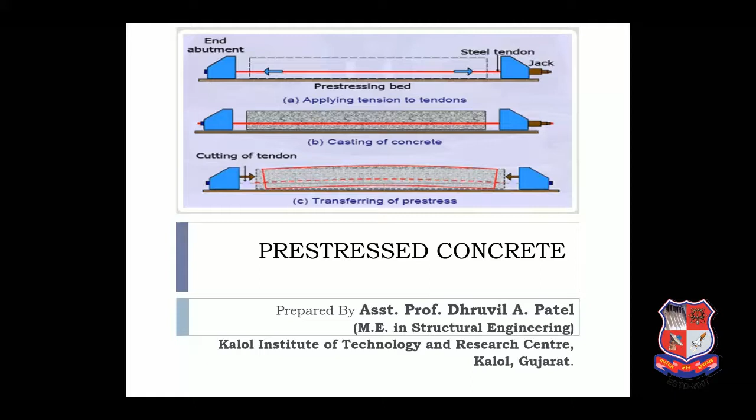First of all, what is pre-stressed concrete? Pre-stressed concrete is concrete that has had internal stresses introduced to prevent, to the degree desired, the tensile stresses that will be imposed in service. The pre-stress is usually imposed by tendons of individual hard-drawn wires, cables of hard-drawn wires, or bars of high-strength alloy steel.

In other words, we can say that pre-stressed concrete is a form of concrete used in construction. It is substantially compressed during production in a manner that strengthens it against tensile force which will exist when in service. A pre-stressed concrete structure is different from a conventional reinforced concrete structure due to the application of initial load on the structure prior to its use. The initial load or pre-stress is applied to enable the structure to prevent the stresses that arise during its service period.

The pre-stressing of structure is not the only instance of pre-stressing. The concept of pre-stressing existed before its application in pre-stressing concrete. Generally, pre-stressed concrete is used in a wide range of building and civil structures where its improved performance can allow for longer span, reduced structural thickness and material saving compared with simple concrete structures.

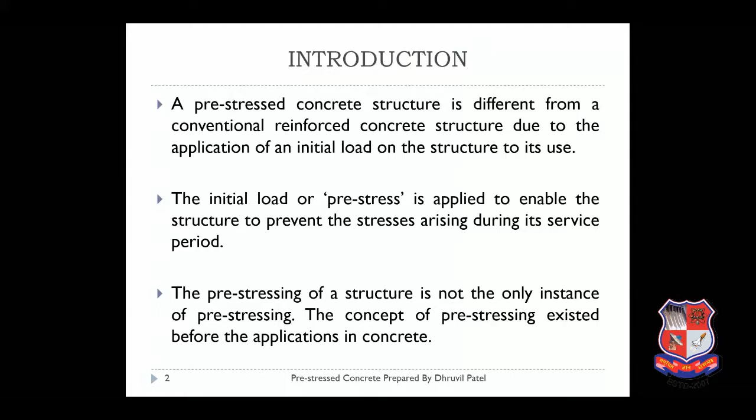For example, typical applications include high-rise buildings, residential slabs and foundation systems, bridges and dam structures, silos and tanks, industrial pavements and nuclear containment structures.

The second point: reinforced concrete beams are generally heavy. They always need shear reinforcement besides the longitudinal reinforcement for flexure. Pre-stressed concrete beams are lighter; by providing the curved tendon and the pre-compression, a considerable part of the shear is resisted.

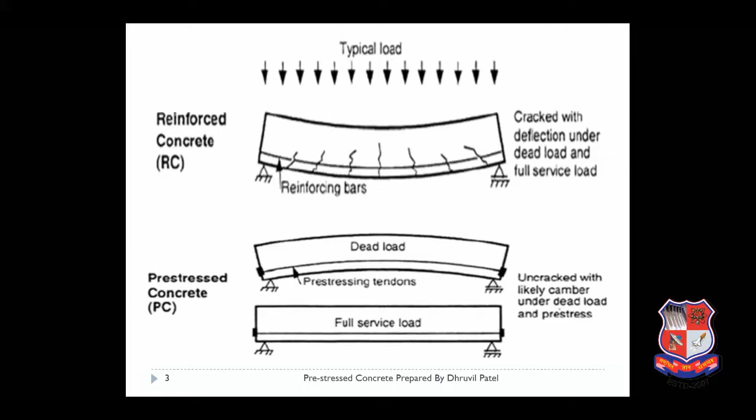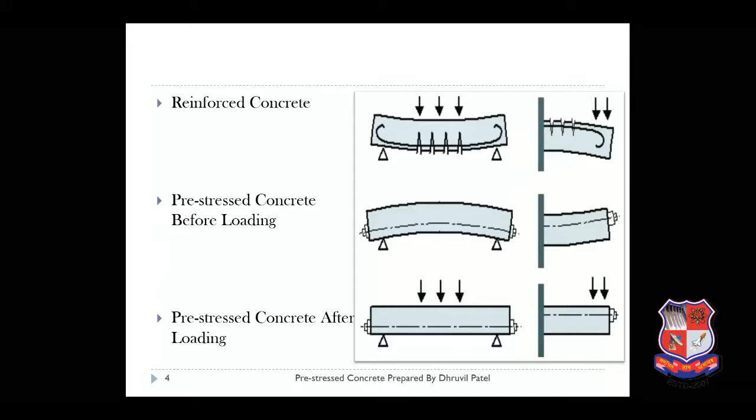So principle of pre-stressing. Pre-stressing is a method in which compression force is applied to the reinforced concrete section. The effect of pre-stressing is to reduce the tensile stress in the section to the point till the tensile stress is below the cracking stress. The concrete does not crack. It is then possible to treat concrete as an elastic material.

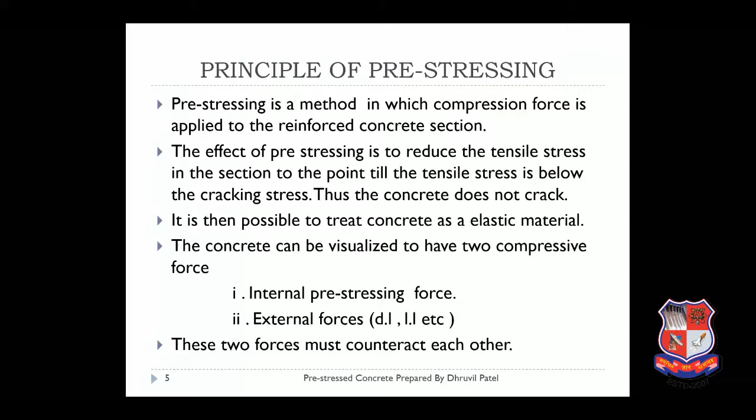The concrete can be visualized to have two compressive forces. First one is internal pre-stressing force, which is developed by internal friction and material, and second one is external force, which is developed by dead load and live load or extra working load. These two forces must counteract each other.

Now, pre-stress concrete method. There are two basic methods of applying pre-stress to a concrete member. First one is pre-tensioning and second one is post-tensioning. Pre-tensioning is most often used in factory situations, whereas post-tensioning is used in cast-in-situ or site use.

First of all, you have to understand what is pre-tensioning. Pre-tensioning is a method of pre-stressing concrete in which the tendons are tensioned before the concrete is placed. In this method, the pre-stress is transferred by bond between steel and concrete. Post-tensioning is a method of pre-stressing concrete by tensioning the tendons against hardened concrete.

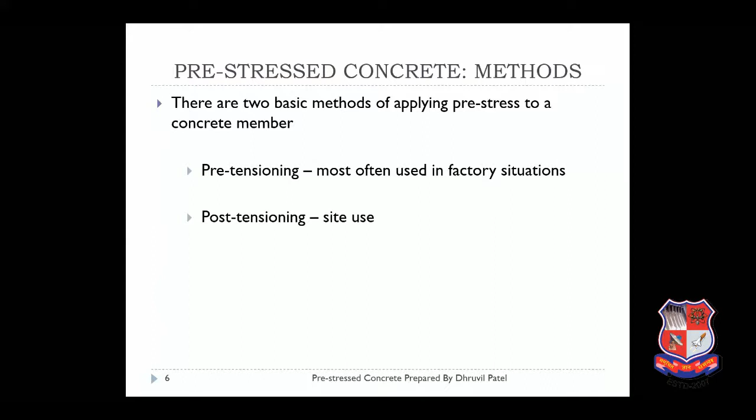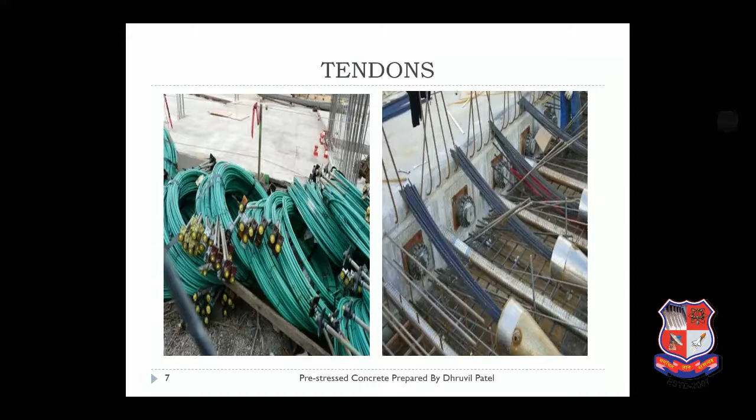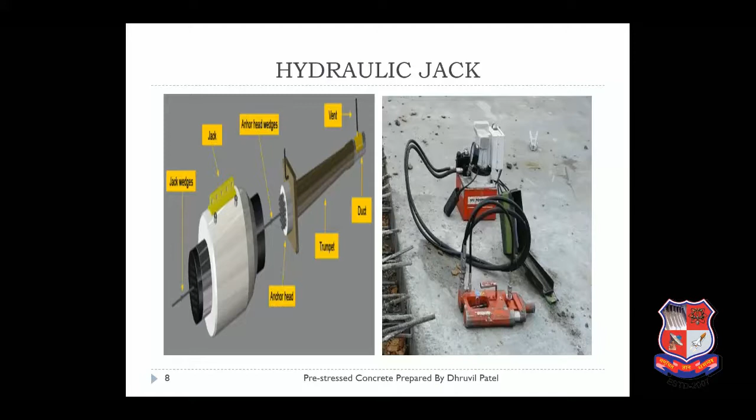Now you can see over here the hydraulic jack. The tensioning of the steel bars or individual wires is usually done by means of a hydraulic jack.

Now second one is wedges. Wedge grips are used to grip each strand during stressing and to hold the strands permanently in the tendon, and anchor after stressing. The jack is removed after stressing and anchoring.

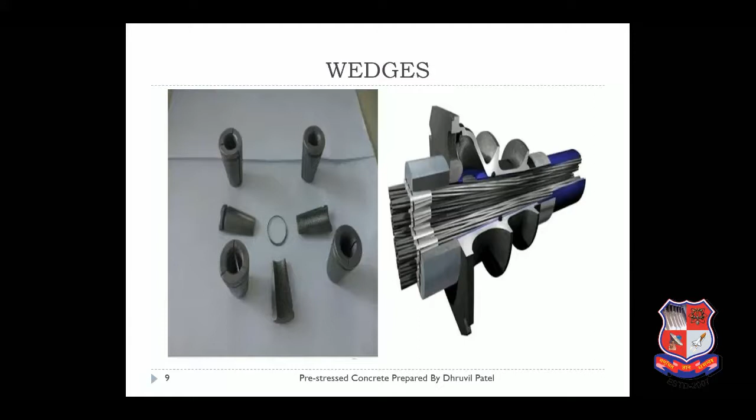Now this is the placement of wedges. You can see over here the figure of the wedge. So this is the wedge, and this is the place where, when you remove the hydraulic jack, the wedges are fixed at the end of the tendon wire.

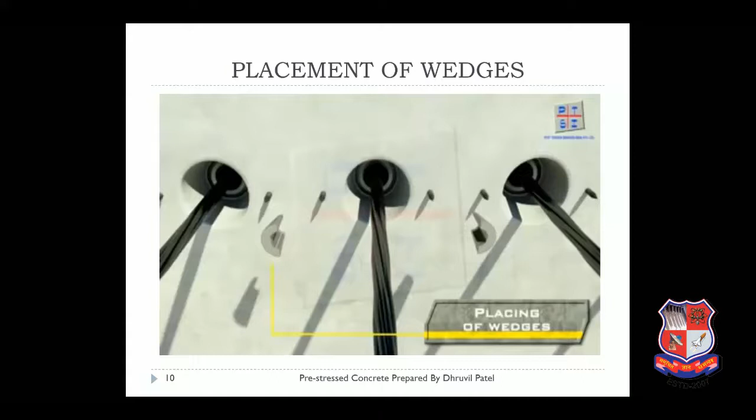This is the tensioning of tendons process.

Now, filling of holes by grouting. Grout is generally a mixture of water, cement and sand, and is employed in pressure grouting and rebar in masonry walls, connecting sections of precast concrete, filling voids and sealing joints, such as those between line tiles.

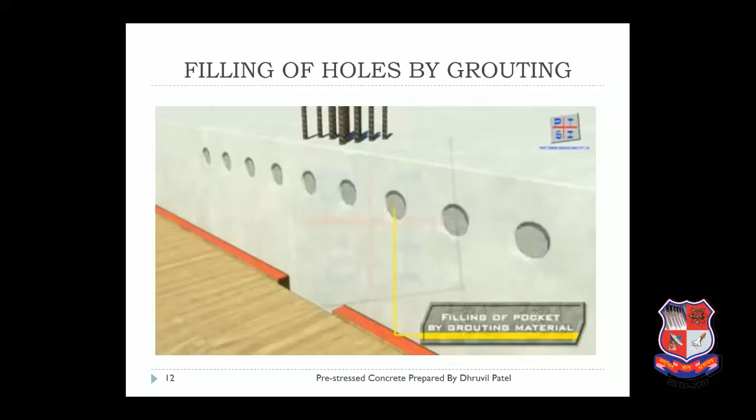Now pre-tensioning. What is pre-tensioning? Pre-tensioning is when the tendons are tensioned against some abutment before the concrete is placed. After the concrete hardens, the tension force is released. The tendon tries to shrink back to its initial length, but the concrete resists it through the bond between them. This compression force is produced in the concrete.

Pre-tensioning is usually done with precast members. The beam or element is constructed in a stressing bed, and stranded cables are placed between two buttresses anchored to a stressing bed which holds the force in the stretched cable. After stretching the steel with hydraulic jacks, concrete is placed in the form around the cables and allowed to harden. When the concrete reaches sufficient strength, the pre-stress force is transferred to the concrete by bond when the steel strands at the end of the beam are cut loose from the buttress.

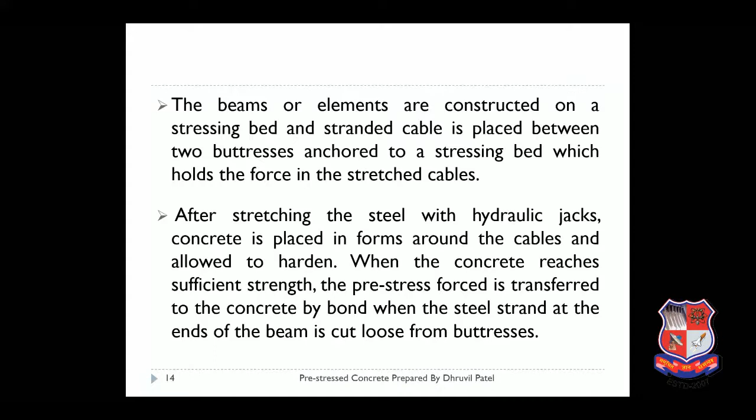So you can see over here the abutment on rock, and at the bottom of the abutment rock is compression piles and abutment on poor soil. The beams are cast, one to a number of beams can be cast over here, and tendons are fixed and stretched before casting of the beam. Then after the beams are cast, and when beams get their strength, the beam is released.

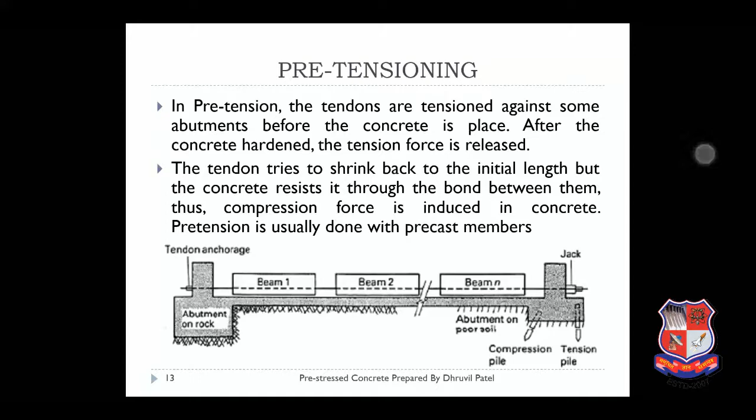So, abutment, steel tendons - you can see over here the pre-stressing bed, applying tension to the tendons. The second figure is casting of concrete, where the cast is - this is the precast, cast in situ in the factory, then casting of concrete. The third figure is transferring of pre-stress, that means cutting the tendon wires and fixing the tendons by wedges.

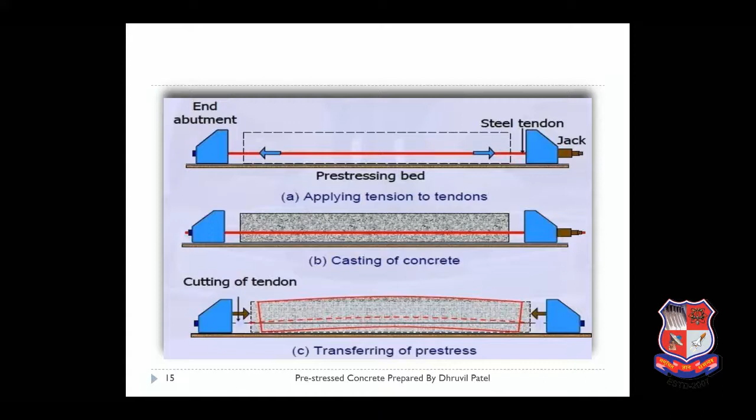You can see over here the factory view of construction of the precast beam.

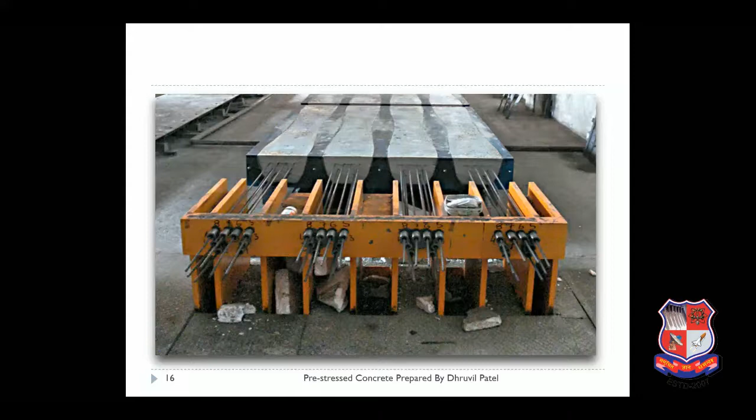Now post-tensioning. Post-tensioning is a method of reinforcing concrete or other material with high strength steel strands called tendons. Post-tensioning allows construction that would otherwise be impossible due to either site constraint or architectural requirement. It requires specialized knowledge and expertise to fabricate, assemble and install.

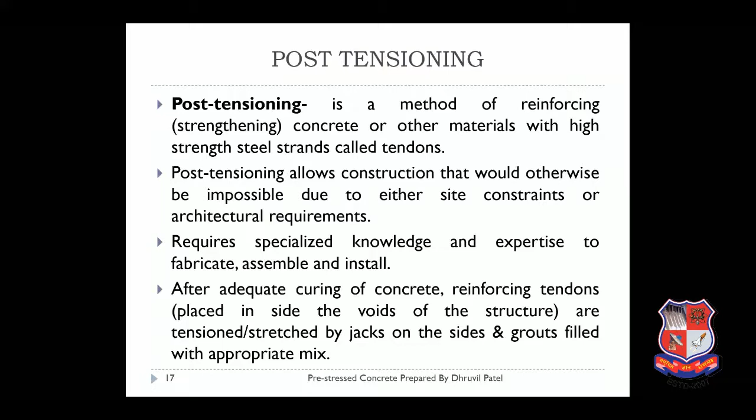After adequate curing of concrete, reinforcing tendons are tensioned by a jack on the side, and grouted with appropriate mix. In post-tensioning, the tendons are tensioned after the concrete has hardened. Commonly, metal or plastic ducts are placed inside the concrete before casting. After the concrete hardens and has enough strength, the tendon is placed inside the duct, stressed and anchored against the concrete.

Grout may be injected into the duct later. This can be done either as a precast or cast in situ.

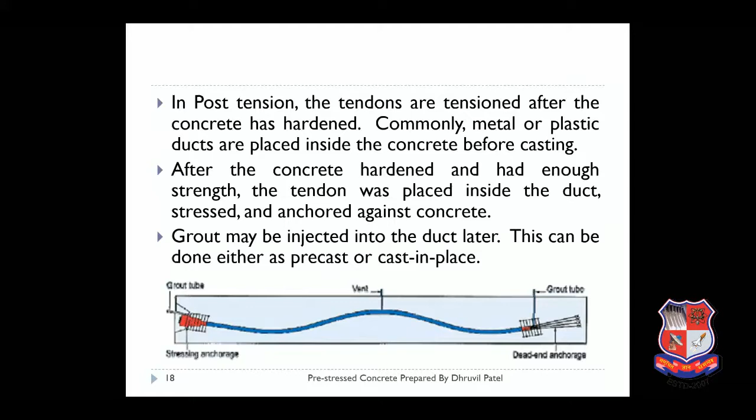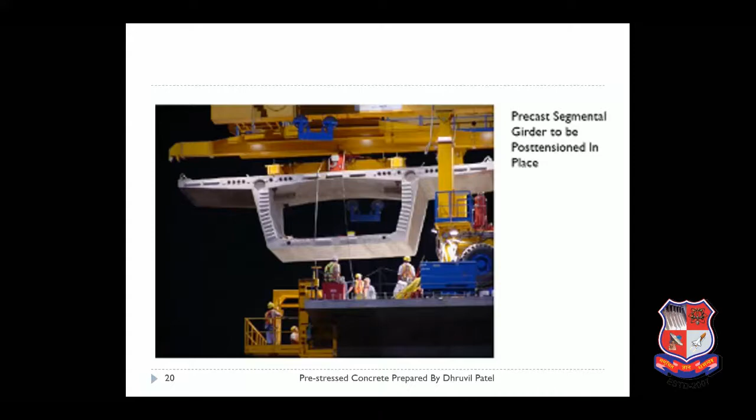Now you can see over here the position of tendon wires set in the beam. This is the precast segment girder to be post-tensioned in place. Process of post-tensioning, rolls of post-tensioning cables.

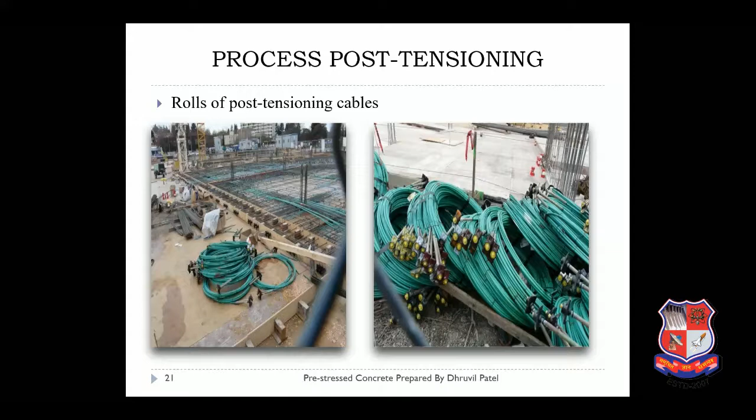This is the tendon wires, you can call them cables. Pulling anchor for post-tensioning cables, and then after, position of post-tensioning cables - this is the view of slab casting.

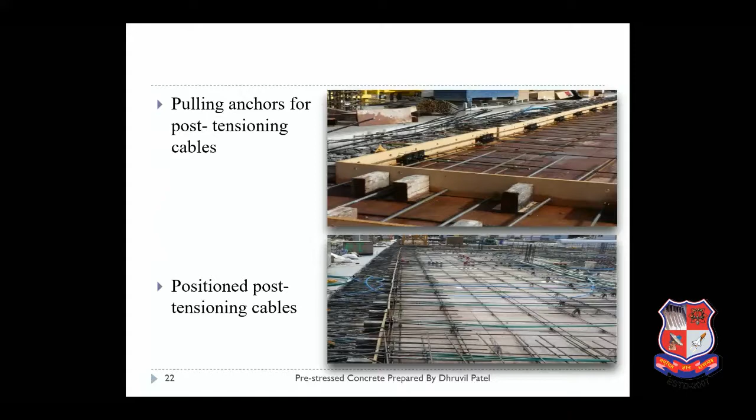Post-tensioning cables extending from freshly poured concrete, and then after the concrete gets its strength, hydraulic jacks are used to pull the cable. This is the last figure of the hydraulic jack.

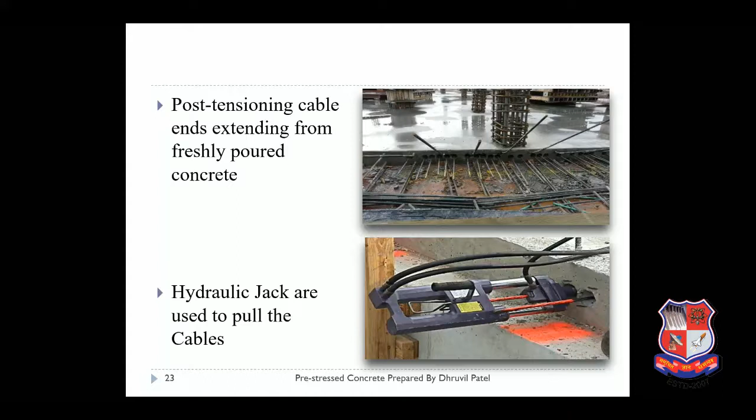Then, advantages of pre-stressed concrete: take full advantage of high strength concrete and high strength steel, need less material, smaller and lighter structure, no crack develops - generally a crack is developed, but it is small compared to an RCC beam. It uses the entire section to resist the load, has better corrosion resistance, good for water tanks and nuclear plants, very effective for deflection control, and better shear resistance.

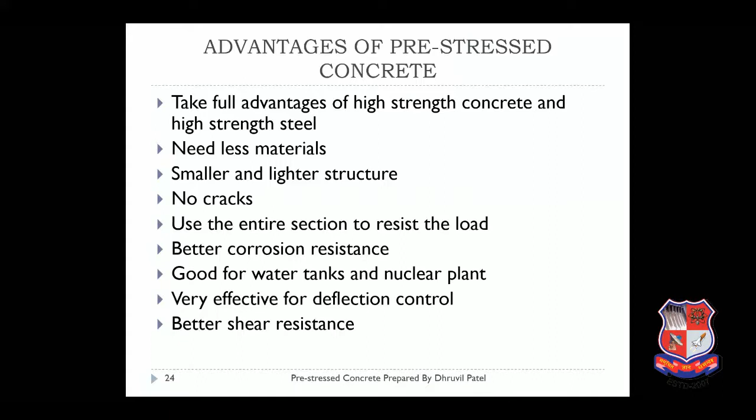Next is disadvantages of pre-stressed concrete: need higher quality material, more complex technically, more expensive, harder to recycle. These are the disadvantages of pre-stressed concrete.

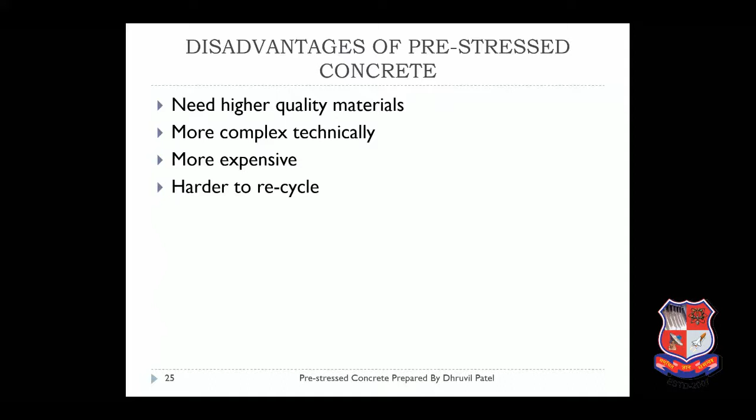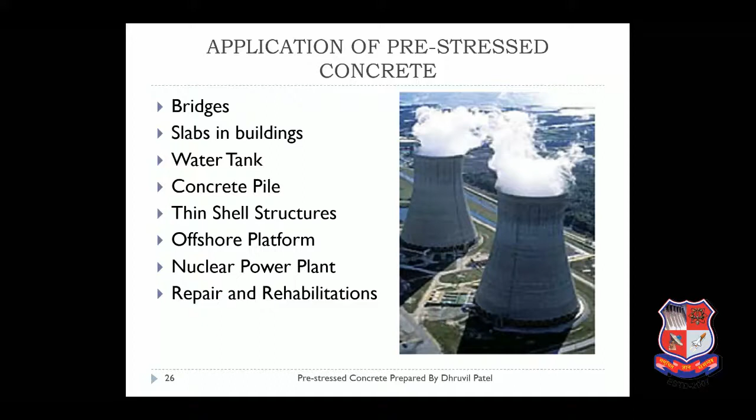Next is application of pre-stressed concrete. First of all, it is used where we have to take high strength, high load. This type of structure is used with pre-stressed concrete: bridges, slabs in buildings, water tanks, concrete piles, thin shell structures, offshore platforms, nuclear power plants, and repair and rehabilitation. Thank you for watching this video.